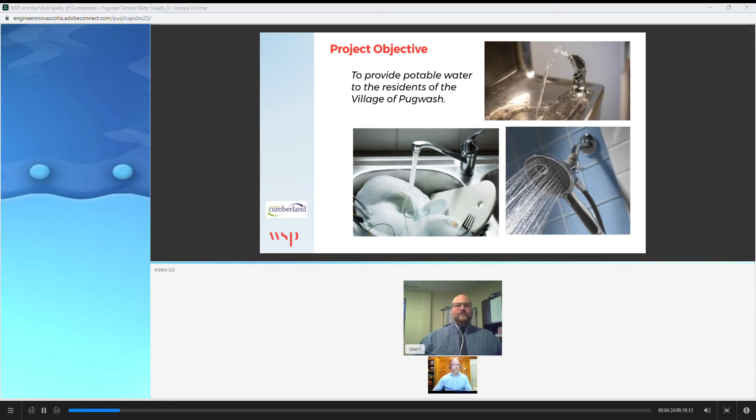Our main project objective for the Pugwash Water Supply project was to provide a safe, reliable source of potable water to the residents of Pugwash and the surrounding area. Pugwash is a small community located on the Northumberland Strait on Nova Scotia's northern shore. It's located in the Municipality of County of Cumberland and has about 800 people.

Some of the more interesting aspects of the village is it's home of the Thinker's Lodge. This is a National Historic Site that dates back to the first half of the 19th century. Conferences, workshops, and educational events have been held here continuously since 1955. The most famous conference was the first Pugwash Conference on Science and World Affairs in 1957. That led to a Nobel Peace Prize in 1995 shared by the conferences and by Joseph Rotblat. The Nobel Peace Prize medal is on display at the lodge, and if you're in Pugwash, you can drop in and see it if they're open.

Pugwash is a major employment hub for the area. The largest employer is the salt mine. It employs up to 500 people and exports salt all over eastern North America. It's the only underground salt mine in Nova Scotia.

There are a lot of people that were involved in this project to make it become a reality. The project owner was the Municipality of Cumberland. We partnered with the federal and provincial governments through the Building Canada Fund to fund this project. 33% of the project's $15 million funding came from the Government of Canada. 33% of the funding came from the province of Nova Scotia. And the Municipality of County of Cumberland and a local improvement charge levied to the direct beneficiaries of the project covered the final 33%. Pugwash Village Commission was an integral part of this project.

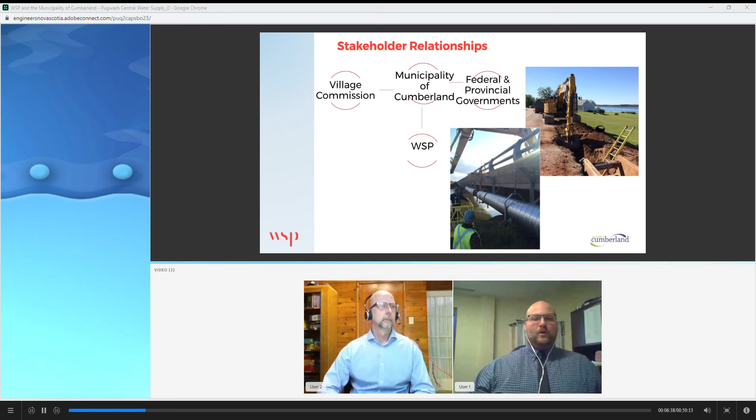They provided local knowledge, a liaison to the community, as well we hosted many of our public engagement events at the Village Commission Hall. And of course, with any project like this, we'll have our engineers. WSP was contracted by the municipality to provide preliminary and detailed design work for this project, as well as construction management. Prior to their involvement, CBCL conducted a study of the private wells to determine water quality issues in the community. And Dillon worked with us on wellfield exploration and finding our water supply source. And there are numerous suppliers and contractors and staff that got us to where we were to have a finished product.

So, why did we do this? Prior to the completion of the project, everyone in Pugwash and the surrounding areas were on their own private wells. In 2008 and 2010, community engagement was undertaken as part of the municipality's strategic planning. In 2008, the municipality's Integrated Community Sustainability Plan identified a reliable and safe potable water supply as an important need for the area. The plan, prepared with extensive public consultation, states, individuals, businesses, and industry all need access to clean water, and therefore the availability and quality of water dictates many, if not all, aspects of community planning. Without adequate water quantity and quality, a community is inhibited from future growth and development.

In 2010, during the public consultation of the Pugwash Area Master Plan, it was noted that a lack of a centralized water system is perceived to have a negative impact on economic development in the area. And I quote, "First and foremost, the participants agreed that water, sewer, and other infrastructure is top priority. It became very apparent in order for infrastructure as a whole to be enhanced and projects to be undertaken, an improved water system is necessary." In the Pugwash Area Master Plan, water infrastructure was highlighted as the top priority and recommendation.

And out of this public consultation process, we started to hear from the community that there were concerns with the quality of the wells they were using at the residences. My wells are salty. I'm concerned with the chemical constituents. So that it became a public health concern.

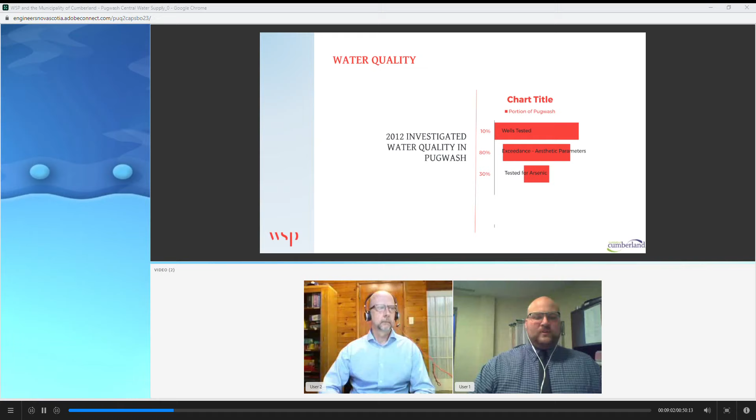So in 2012, the municipality started working with CBCL. We tested 10% of the wells in the Pugwash area. 80% of the wells tested had an exceedance in aesthetic parameters, and 30% of the wells tested above the health criteria for arsenic. There are other health concerns. Uranium was also present in a significant portion of the wells. Knowing this, it gave council a mandate to move forward with the project, knowing there was a public health concern, on top of the consultation identifying that it was a barrier to economic development and growth in the area.

So our next step was to find this safe and reliable source of water. We worked with Dillon Engineering starting in 2013 to identify an appropriate source of water. Criteria we considered were proximity to the village. Would the geology of that area be likely to bear water? Was it isolated so we could easily protect it and manage the source water area?

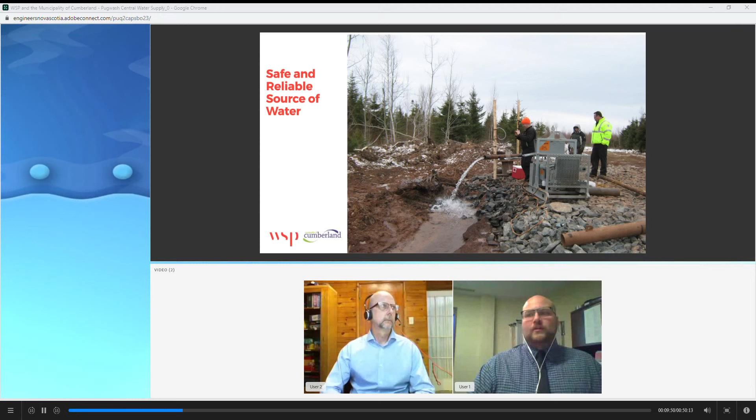While it's not completely the opposite, we need to make sure it's accessible as well as isolated. If it was accessible from a quad trail or a public or private road, that would have been a real benefit to getting in there and drilling the wells. We want the site to be non-boggy, and we considered land ownership. If it was owned by the Crown or the municipality already, or someone known to be supportive of the project, that would have played a factor in selecting.

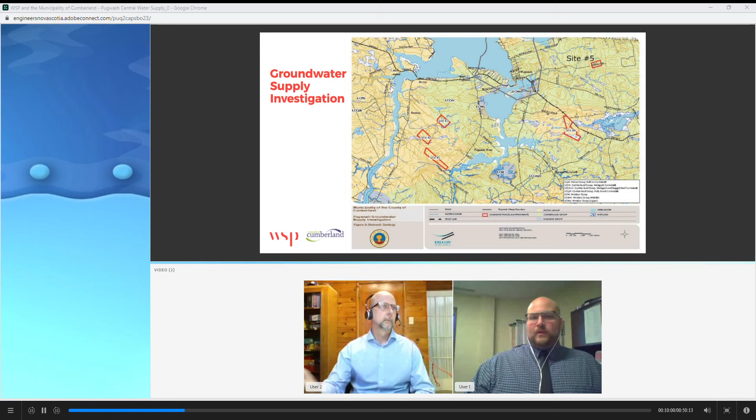So we drilled over 15 wells in 6 different locations. Some of them are based on the criteria seen there. Others are through local knowledge, where we'd hear from a farmer that, oh, in back the Irish Town Road, we've always had good water. There was a very accessible private road, and we went back and tested it, and that one didn't bear the quantity of water we required.

In the end, Site 5 in the Rockley area was the successful site. It was the last site we tested because while the geology was the most promising to yield water, it was the least accessible of all the sites.

So the final location, Rockley, here's Highway 321, and this yellow line here through the middle is a quad trail used by local ATV and snowmobile groups, but we upgraded a lot of that through the well area. We have 3 production wells drilled, and the black line around the edge is the area that's owned directly by the municipality. We purchased around 100 hectares that essentially represents the 2-year capture zone for the source water area.

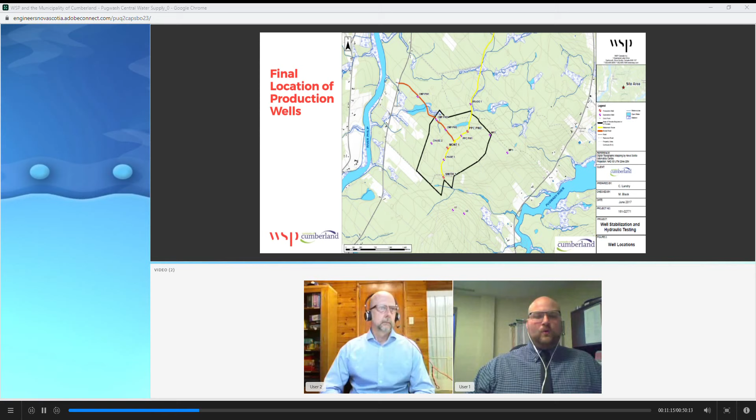We have put into place a source water protection plan and are working with the province and our source water protection plan committee to establish this as a designated water supply. And that work is ongoing.

Pat, I'll turn it over to you. Thank you, thank you, Justin.

So I'm going to take you through when WSP became involved. Once the municipality had secured a good location for the quantity and quality of water that they're looking for, they engaged WSP in the preliminary and eventually the detailed design on the project. So when we became involved, a few things that we wanted to look at to build this project really from the ground up was the water demand. We had to look at the village core and how many users we were going to have.

We had to go look at the wells to ensure that they were indeed of the quality and quantity, and if we could protect them and stabilize them. As Justin mentioned, the site was not the ideal location as far as accessibility, so we had to ensure that we could indeed access the well field and supply power to it, since it was sort of in the middle of the woods. Next thing we considered in our preliminary design is if we could achieve a location for a reservoir and what size that would be.

And then the next step was to look at the treatment based on the initial data that we had on the well quality. And finally, we had to get the water to the residents, so we had to develop the distribution and transmission network. And finally, obviously, you need to keep in mind project budget and schedule based on the funding that the municipality had in place.

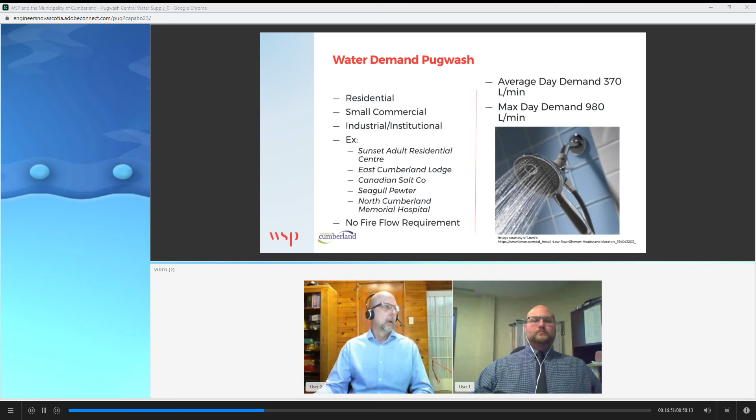So again, back to the wells. They were developed a few years before we got involved, so we had to go back and revisit them. We had to ensure that they were still adequate, that nothing happened to them during that period when they were dormant. So the first thing that we did was a downhole video survey of the wells to identify if there were any issues with them. And we noted that the type of geology there, the sedimentary bedrock sequence that was observed, was kind of fractured and brittle and broken.

And when we looked at the raw water results, we were seeing some elevated levels of turbidity in at least two of the wells. This was initially a bit of a concern to us because of the various types of treatment technology that we were considering. Turbidity could be an issue, and you may have to look at trying to reduce that or filter that out in advance of the treatment. So the first thing that we attempted to do was to reduce that in the wells.

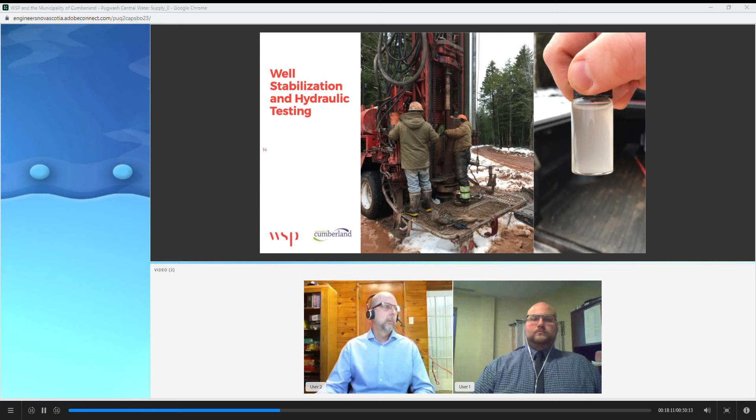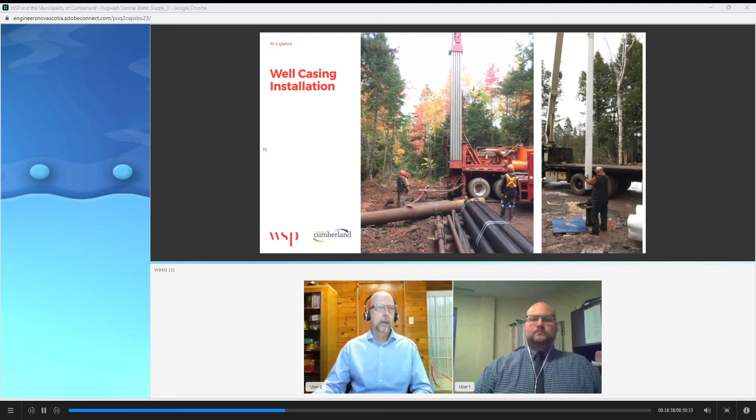And our solution to that was to ream the wells and install a PVC liner that had solid sections and sections with slots in it. The whole idea of this was that the PVC would protect the wells from the turbidity or the sediment getting in the wells, as well as placing the pump itself in a solid section, so that would reduce the turbulent flow within the well. So you can see a couple pictures of us upgrading the wells and sliding the PVC liner in place.

Next thing, again, as we mentioned earlier, site access was, I wouldn't say a concern, but it definitely was a challenge for the site. There was an existing woods road, and I'll use that term lightly, to get into where the wells were. You wouldn't take your Tercel in there by any means. But it was accessible, at least to get into the sites to do the drilling. But in the long term, it wasn't ideal.

So we had to take that access road and upgrade it. It was about 1 kilometer long. We also had to obviously get power into the site. We needed power for the wells. We needed power for the treatment plant, which was going to be located sort of in the center of the 3 wells. That identified another hurdle for us.

Like many parts of rural Nova Scotia, 3-phase power is not readily available. In most areas, it's single-phase power. Now, I'm not an electrical engineer, and I'm not going to attempt to pose as one, but it was, I guess, an issue, because typically when we're looking at treatment equipment and pumps, 3-phase power is ideal. When we looked around the area, the closest 3-phase power was about 12 kilometers away.

There were a few different options there. One would possibly involve routing where we would have to cross a river, which poses a whole other level of approvals and challenges. So we went back and said, can we utilize the single-phase power and not have this additional capital cost for extending the 3-phase power to the site?

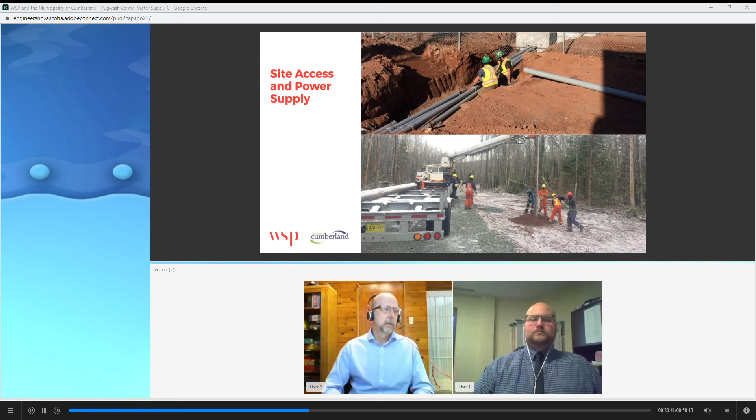So the way around this is to use VFDs on all the equipment, the pumps and all the other mechanical equipment. So by doing that, we're essentially converting the single-phase power to 3-phase power. Again, pros and cons with this. Initially we lowered the capital cost of the power supply, but we increased the capital costs a little bit for the operating equipment. And there's a bit more operating costs associated with the VFDs as well.

But the upside is that, particularly with the pumps, the VFDs provide us that additional control over the frequency of the pumps, which helps us better regulate the flow to the treatment plant. So in the end, that was the solution that we chose. To ensure that the plant continued to have power during outages, as Justin alluded to earlier, during Dorian last year, when essentially the entire village was without power, they were able to still supply water to the community because we had a backup power generator at the station.

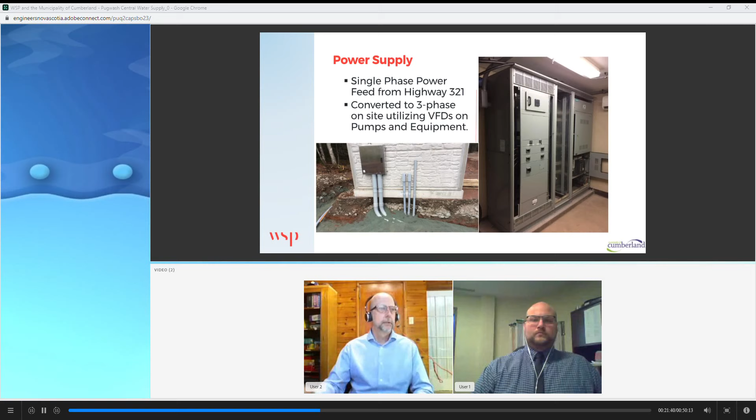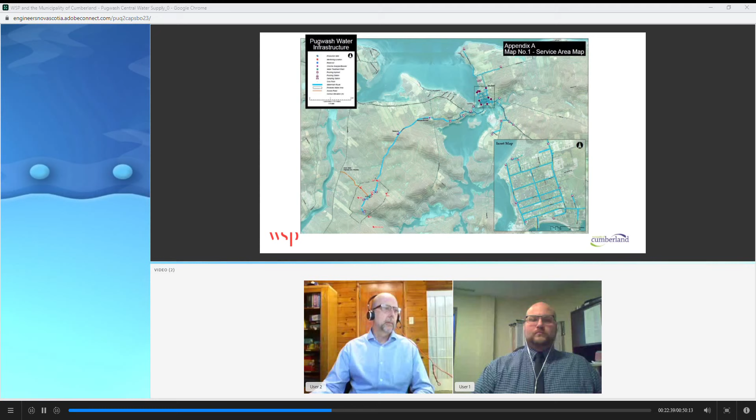We had to size the tank accordingly, and essentially the tank is sized based on the hydraulic grade line required. So there's an element of dead storage there to elevate the column of water up to get the hydraulic grade lines to achieve the pressures in the town. The next thing that the tank provides is emergency storage. So in the event that the treatment plant is down for some reason, we're still able to provide water to the community with emergency storage for at least a day or so.

So we looked at solar power as providing the power. We didn't need a whole lot of power there, but we did need to provide power for the instrumentation and control so the tank could communicate back to the treatment plant.

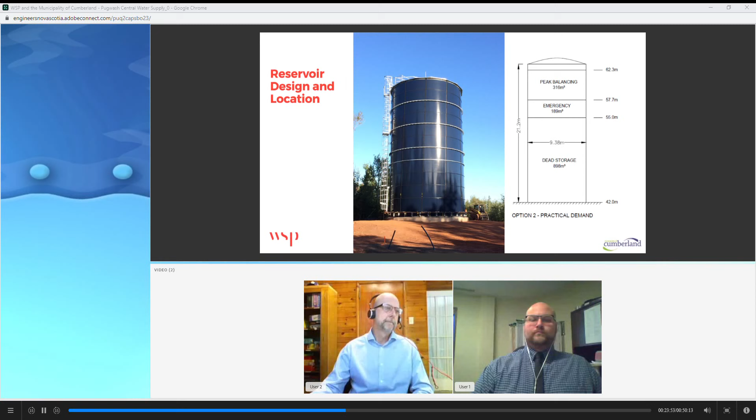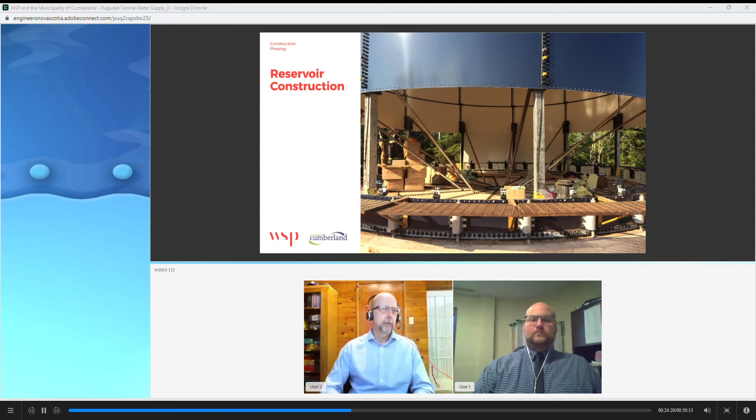Next couple pictures here are showing the construction of the tank, and I found this kind of fascinating in the sense that the tank is actually constructed from the top down. So they place the panels, they bolt them together and jack the section up. So they actually build the top of the tank first and jack it up from the bottom until eventually they reach the full height of the tank.

So you can just see a couple of pictures there during construction, and then the final product for the tank. It's quite a nice looking tank. It's still nice and shiny and blue.

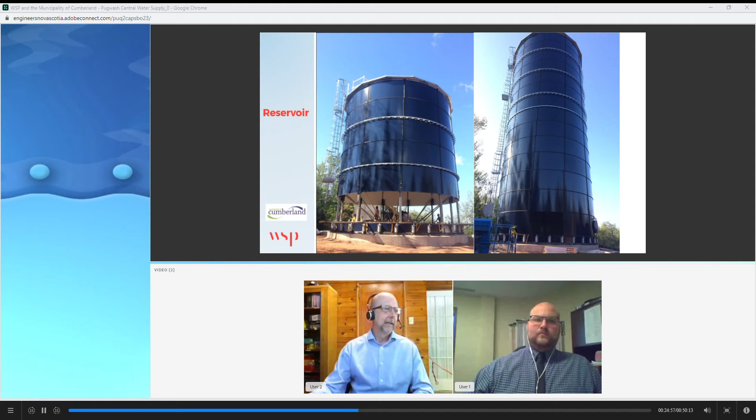Most tanks often have the community name on the side of the tank, and we considered that, but when we sort of did a mock-up, you couldn't really see it from anywhere because the tank was so remote. So we didn't end up putting the village of Pugwash on the side of the tank because you could only see it from a distance. So that's about it.

Another shot from the aerial view of the tank, so that gives you the perception of sort of there's not much around it, and there's our communication on it, and a nice shot inside the tank.

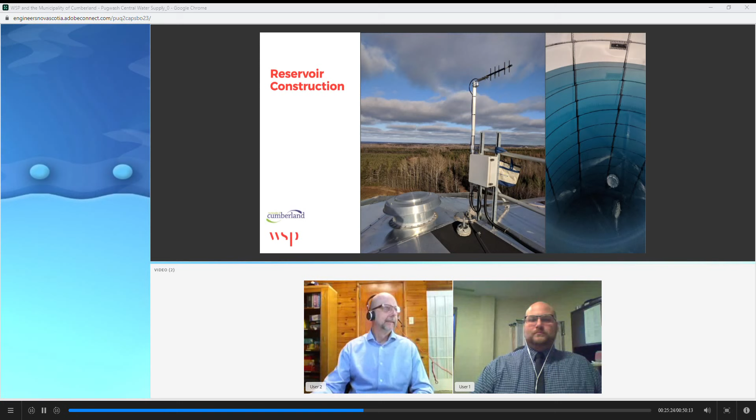So now we have a well supply and we have storage. Treatment was the next point of consideration in our design. Based on the data that we had on the quality of the water, we had two areas that we had to treat for, and these are aesthetic in nature. It's the iron and manganese. Generally, the water is good quality, but has elevated levels of iron and manganese to meet the guidelines.

So we looked at having a pre-qualification of treatment processes because we wanted to consider the various types of treatment processes out there in our design. So we did an RFP for the treatment equipment. And the considerations in the evaluation were obviously it had to treat for the iron and manganese. It had to have the ability to have redundancy in the treatment train.

So if for maintenance reasons or something else one of the trains was down, we had to still keep the plant operating. We wanted to be able to pump directly from the well field through the treatment process right to the tank without requiring any type of storage at the treatment facility.

Capital costs obviously factor into it, and it was very important for the municipality to consider the long-term operating costs because of their funding models. So they had available funding for the construction, but at the end of the day, once things are operating, the long-term operating costs are on the utility.

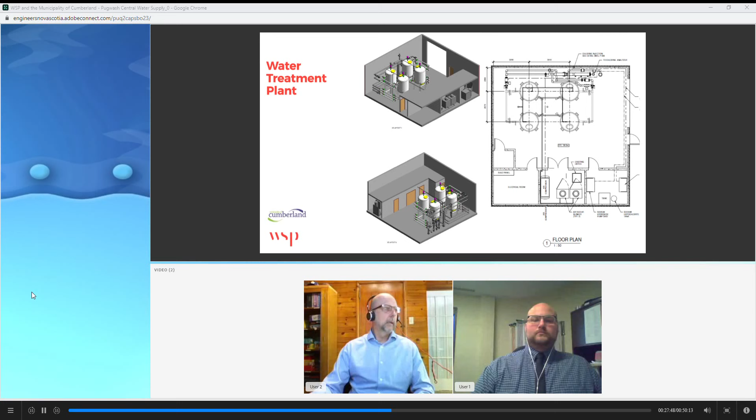So the panels snap together sort of like, I guess, Lego or IKEA. And concrete is poured in the panels and you have a finished surface already on the outside. So it provides great long-term low maintenance. And for the inside of the plant, if you need to spray anything down, it's ideal for that.

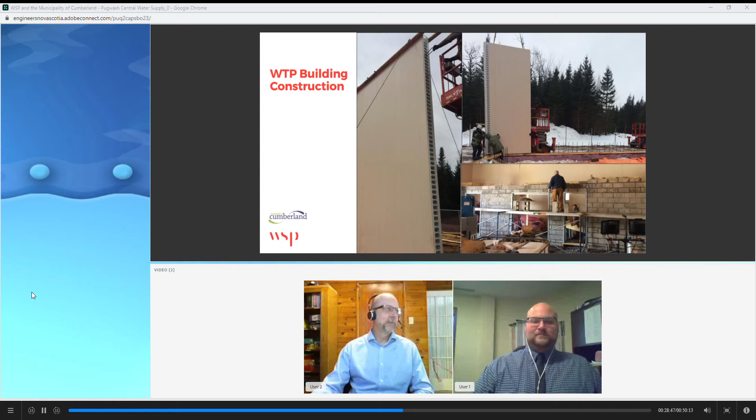And again, bulletproof. Again, an odd consideration, but it is definitely a consideration on this project. Not that everybody in Pugwash is toting guns, but like I say, it is an area where there could be hunters and people like to take target practice. So,

So in the end, we selected a two-stage Ferazur Mangazur biological pressure filter system by Suez. This Ferazur is the first of its type in Nova Scotia. So I said it's a two-stage. The first stage is 2 Ferazur filters for dissolved iron. The second stage is 2 Mangazur filters for dissolved manganese. And essentially the science behind it is there's naturally occurring bacteria in the water that adhere to the filter media and they produce a biofilm. The BioLite is the patent filter media by Suez.

Process air is injected to promote growth, and you can add sodium hydroxide to adjust the pH balance in the water if need be. The biologic oxidized metals form a really compact precipitate that is incorporated into this biofilm and essentially strips the iron and manganese out of the raw water. Again, for a lot of people, this may seem like a bit of an unusual type of treatment process, but it's worked quite well, quite successful in other areas.

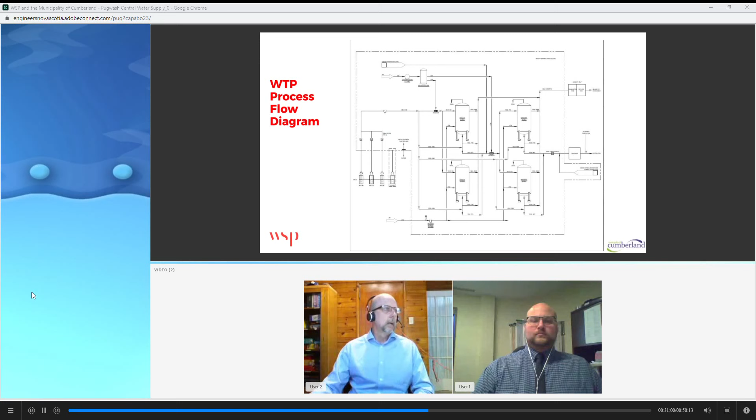Next couple of pictures here are just some pictures within the treatment facility. The one on the left there is the media, and on the right there you can see some of the tanks. It's fairly compact. It arrived in pieces and was put together and commissioned. Fortunately it fit in the space. And like I say, it was selected really based on its ease of operation.

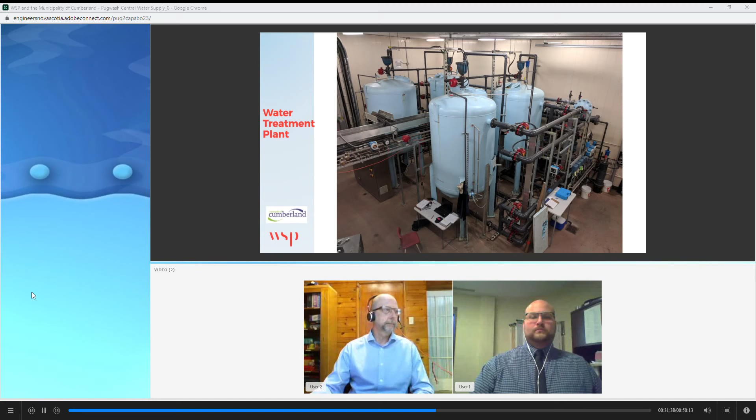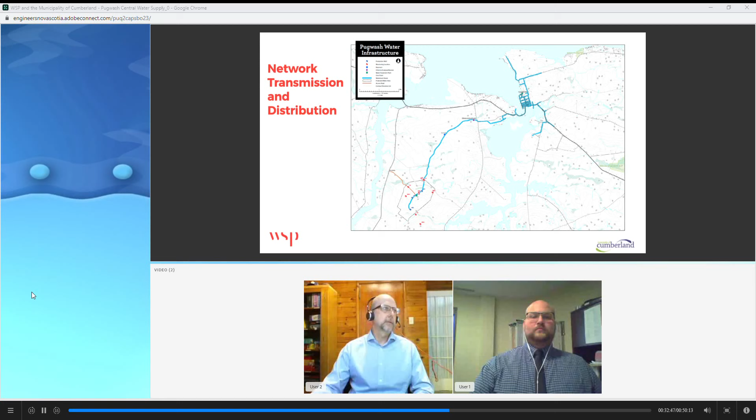The nature of the area is that we really had 3 distinct areas of water main installation. So we had the inside core area of the village, and it's your traditional rural village with compact streets, a grid network. There is sanitary in the village, so we had to deal with existing infrastructure that was there and locate our water main accordingly. There were some cross culverts, so a little bit more confined.

We had the area outside the village, and I should add that all of these roads are actually owned by TIR and not the municipality. So we had to work with TIR to get their approval and acceptance of the water main. Generally outside the village, the water main is located at or near the shoulder of the road. These are all your typical rural road cross section with ditches.

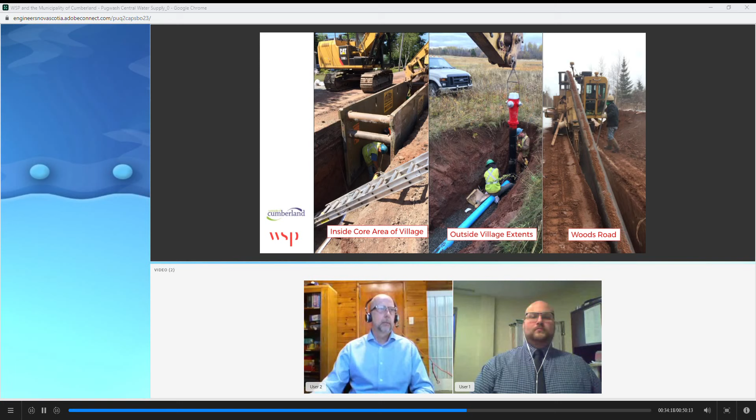And then we had the section just to the right there, which is the main transmission main from the treatment plant out to the Old Murray Road. And really, since there were no services along this section, it went in pretty slick. We actually used HDPE fused pipe, and they used a trenching machine to install it. So they would fuse the sections of pipe together on the surface, and then roll it into the trench.

A couple little design considerations along the routing: we had two bridge crossings actually. So you'll see a picture there at the Palmerston Bridge. In our initial stages of the design, we considered if we would directional drill, which was a fair distance across the harbor there, and would also come with some pretty significant challenges based on the geology. So we did weigh that out and weigh out the cost of that, but in the end we chose to hang the water main off the bridge.

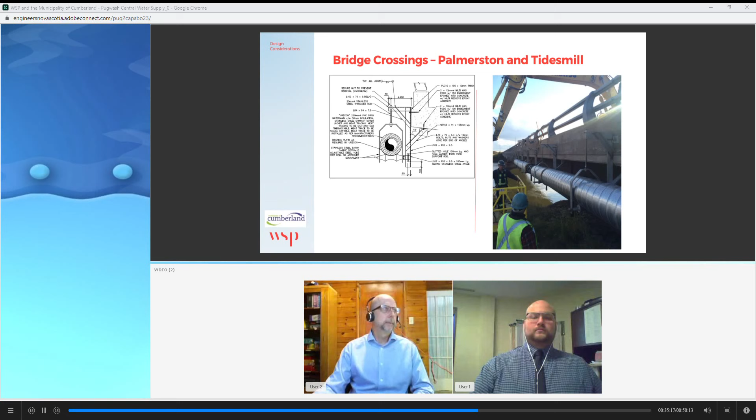Obviously, since it's exposed, we've insulated and heat traced it. So that was at Palmerston Bridge, as well as we had another water course crossing with a bridge at Tidesmill. In addition, through the woods section, we had a few water courses that we had to deal with. So rather than disturb the water courses, and because we were using the HDPE pipe anyways, we chose to directional drill these water courses. This minimized the disruption of the water courses and minimized the permit requirements related to that.

Well sites, buildings, and pumps. We have our wells. We have to provide equipment at the wells, controls and whatnot. Again, back to the bulletproof question here. We put structures at each. These are precast Shaw structures that were put at each one of the wells, as well as the chlorine booster station between the tank and the first customer. These are sort of little huts that came together and kind of look like something out of Fred Flintstone, but they snap together pretty well and are pretty secure structures and provide the space for the mechanical electrical controls.

Installation in the wells itself: we selected our pumps. We have 3 wells that are currently operating. We have a 4th well that is available should it be required in the future for further development. We installed submersible turbine pumps with pitless adapters, so once everything is installed, it's sort of all below the surface. Two wells are similar in size, so the pumps are 15 horsepower, and the smaller well with lower yield was 10 horsepower. So they provide about 5 to 7.5 liters a second.